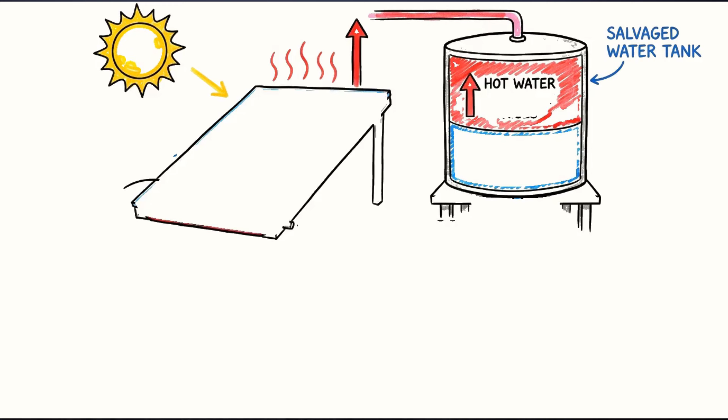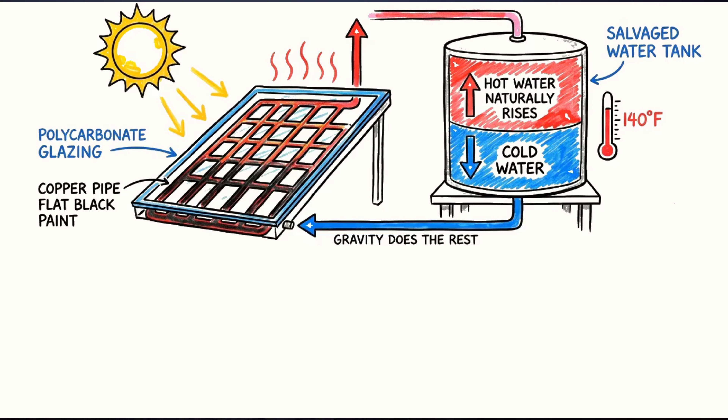This $75 system, built from copper pipe, flat black paint, a sheet of polycarbonate glazing, and a salvaged water tank, can heat 60 to 80 gallons of 140-degree water every day without a pump, a controller, or a single watt of electricity. It is called a thermosiphon solar water heater, and it runs on a principle of physics so simple

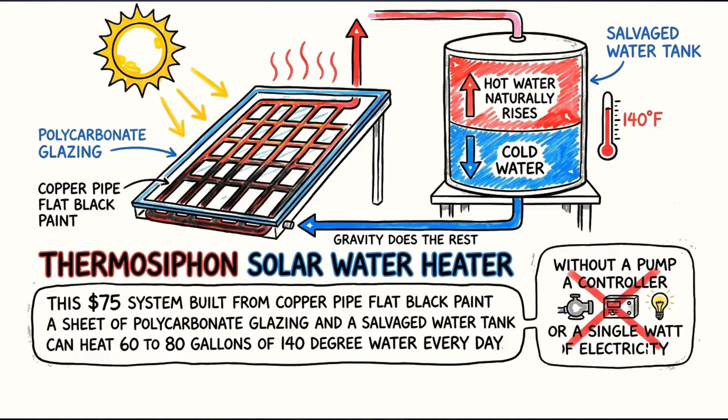that it was understood in the 1700s, where hot water naturally rises above cold water and gravity does the rest. In 1941, over 60,000 of these systems were installed across Florida, and more than half the homes in Miami heated their water with the sun.

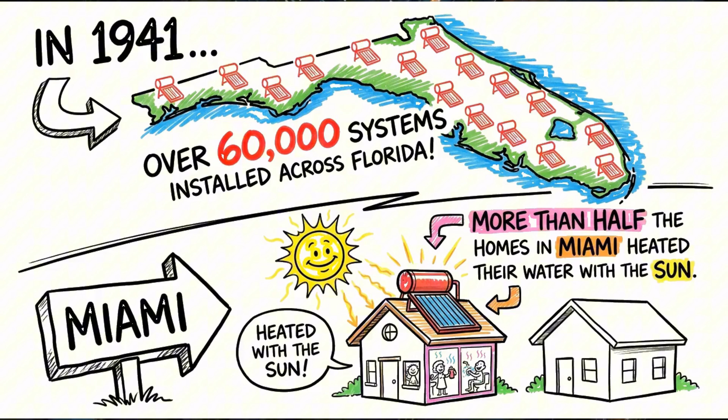But the technology was deliberately buried after World War II, and almost no American household uses one today.

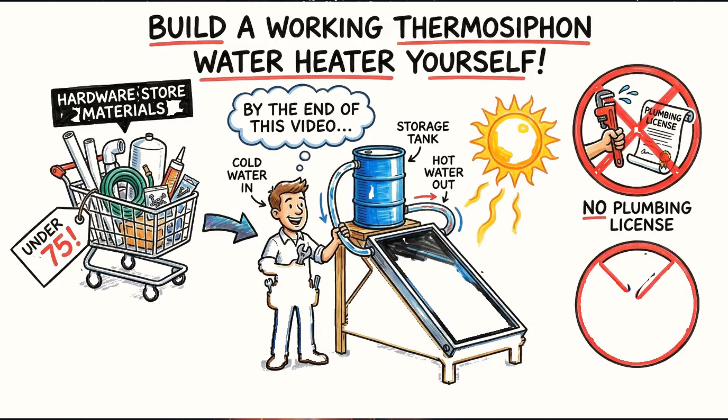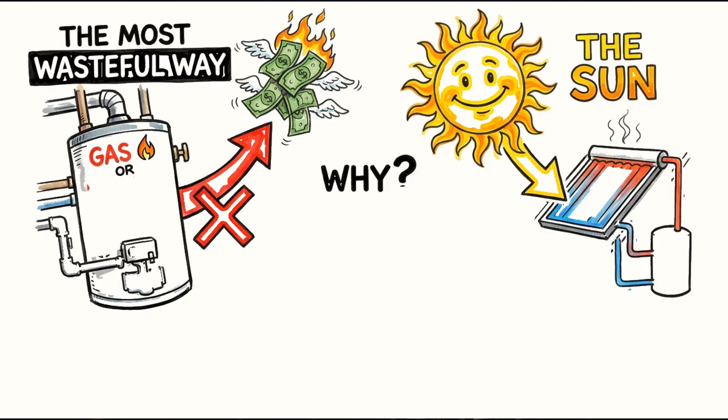By the end of this video, you can build a working thermosiphon water heater yourself from hardware store materials for under $75 in a single weekend, with no plumbing license and no electrical work. You'll know why a gas or electric water heater that costs you $400 to $600 a year to operate is

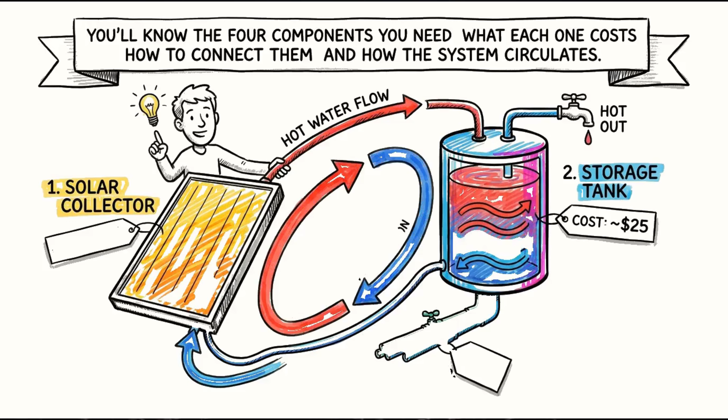the most wasteful way to make hot water when the sun does it for free. You'll know the 4 components you need, what each one costs, how to connect them, and how the system circulates water automatically using nothing but heat and gravity. And then, I'm going to show you why the $27 billion American water heating industry and the electric utilities that feed it made absolutely sure this technology disappeared from your hardware store, your building code, and your memory.

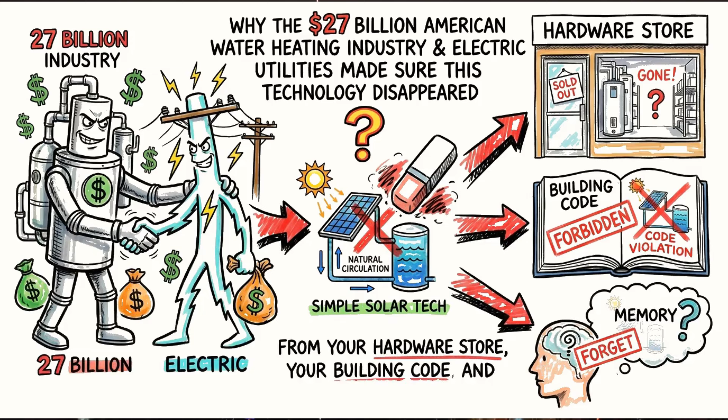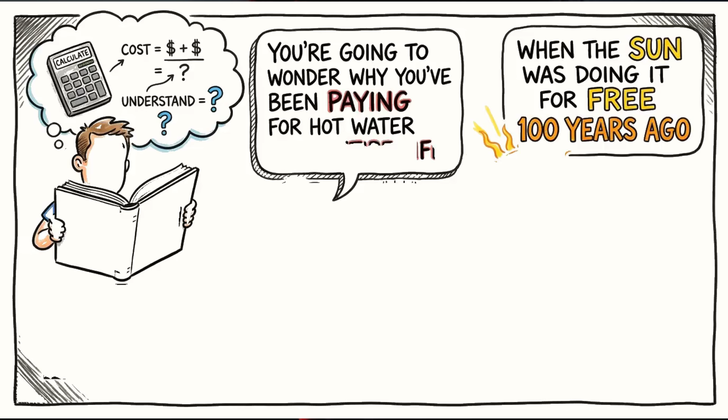But first, you need to see what your current water heater is actually costing you. Because once you understand the math, you're going to wonder why you've been paying for hot water your entire life, when the sun was doing it for free 100 years ago.

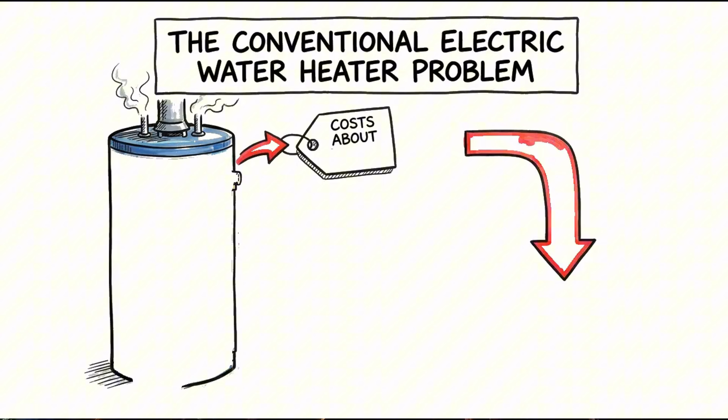Here is the problem with every conventional water heater in America today. A standard 50-gallon electric resistance water heater costs about $500, uses between 4,000 and 5,000 watts of electricity, and runs an average of 3 hours per day, which adds roughly $400 to $500 per year to your electric bill.

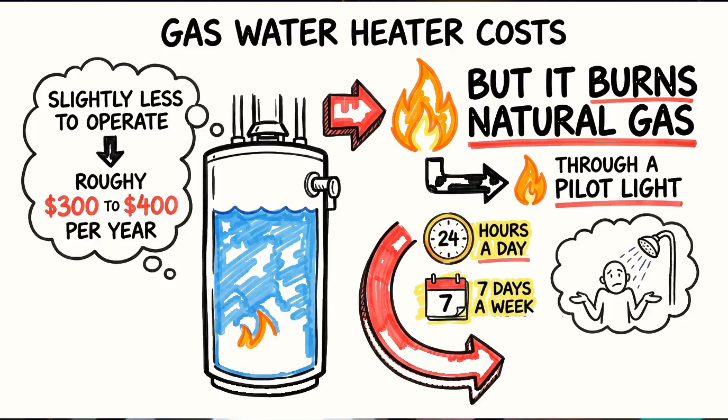A gas water heater costs slightly less to operate, at roughly $300 to $400 per year, but it burns natural gas through a pilot light that runs 24 hours a day, 7 days a week, whether you need hot water or not. Both types last 10 to 15 years before the tank corrodes and the heating element fails, and then you replace the entire unit and start the cycle again.

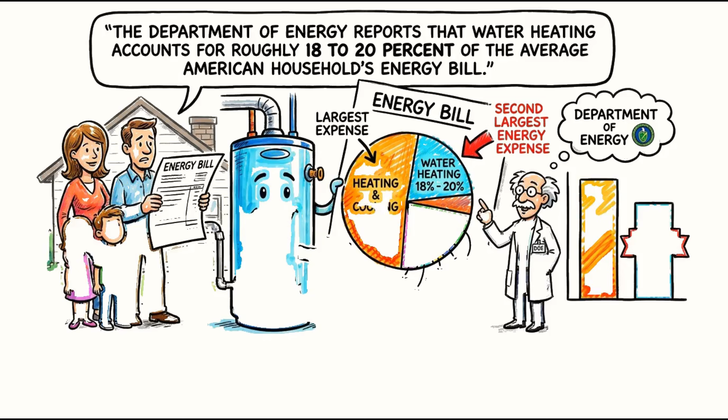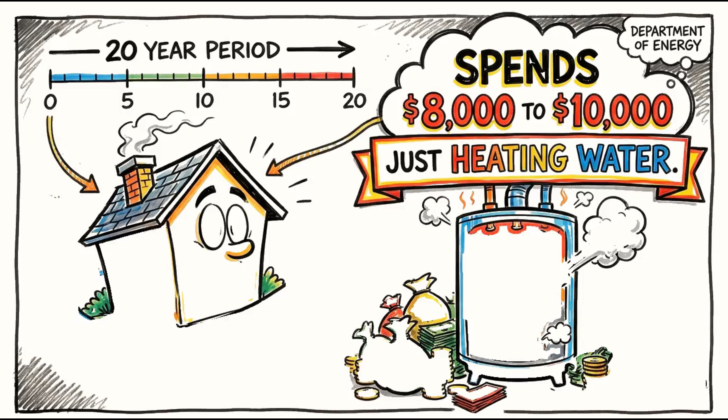The Department of Energy reports that water heating accounts for roughly 18 to 20% of the average American household's energy bill, which makes it the second largest energy expense after heating and cooling. Over a 20-year period, a typical household spends $8,000 to $10,000 just heating water, and that is not counting the cost of replacing the heater itself every decade.

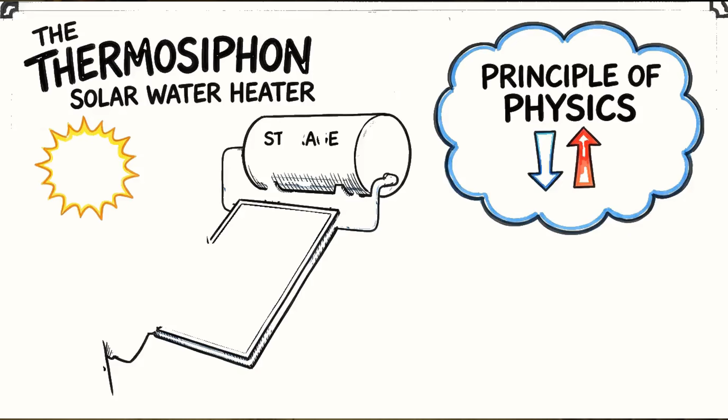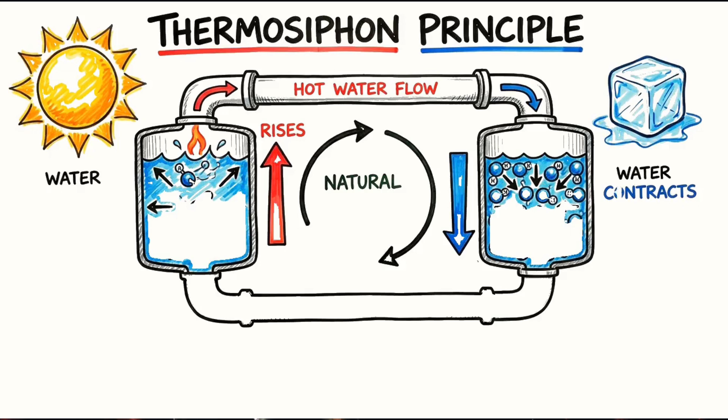The thermosiphon solar water heater eliminates that entire cost by using a principle of physics that requires zero energy input. A thermosiphon works because water expands and becomes lighter as it heats up, and contracts and becomes heavier as it cools down.

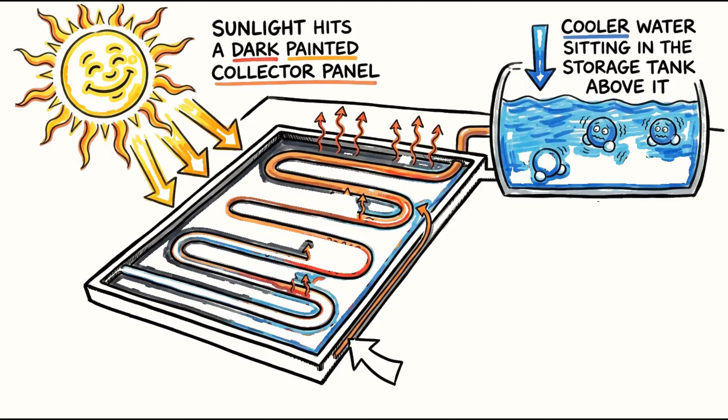When sunlight hits a dark painted collector panel, the water inside the panel's copper or CPVC tubes absorbs that heat and becomes less dense than the cooler water sitting in the storage tank above it. The lighter hot water naturally rises through the outlet pipe at the top of the collector into the storage tank,

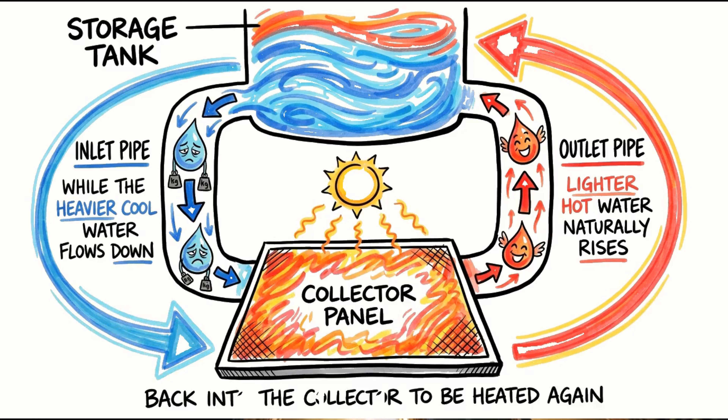while the heavier cool water at the bottom of the tank flows down through the inlet pipe back into the collector to be heated again. This creates a continuous, gravity-driven loop where water circulates automatically between the collector and the tank as long as the sun is shining,

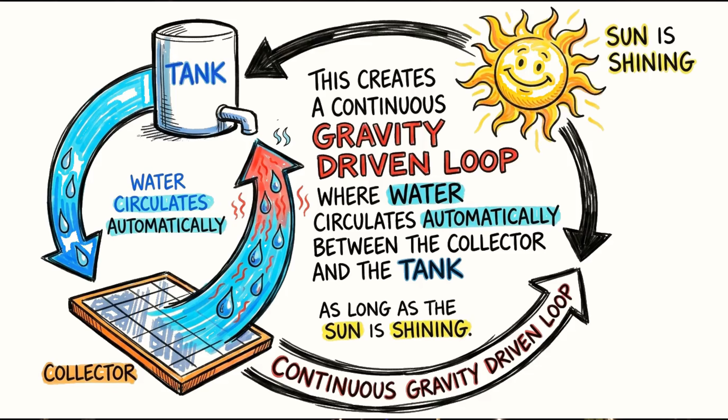with no pump, no thermostat, no controller, and no electricity. The principle is called natural convection, and it was first described by scientists in the 1700s, studying how heated fluids

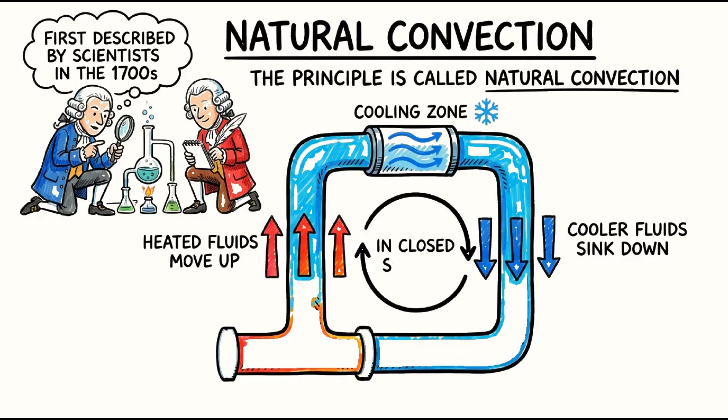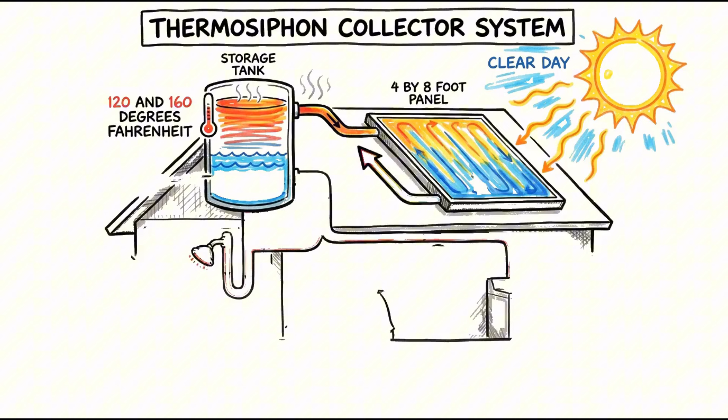move in closed systems. A well-built thermosiphon collector with a 4x8-foot panel can heat 60 to 80 gallons of water to between 120 and 160 degrees Fahrenheit on a clear day in moderate climates, which is more than enough for a typical household's daily hot water needs.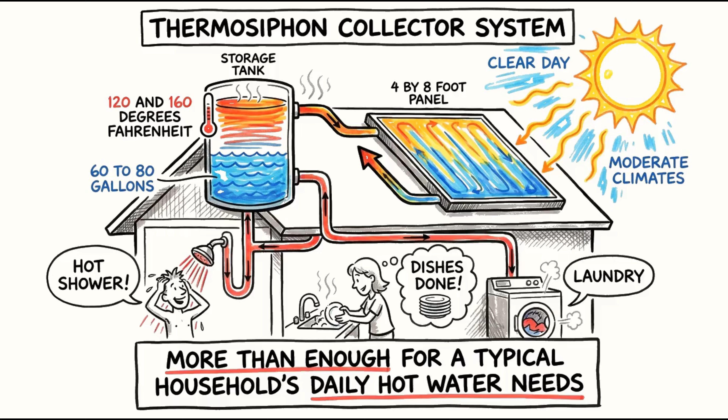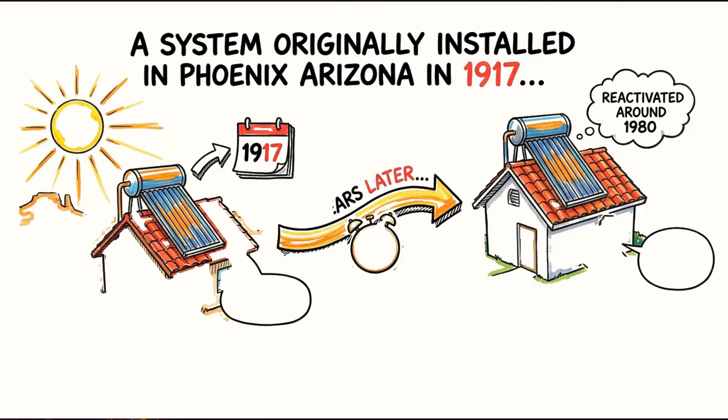The system has 0 moving parts, which means there is nothing to break, nothing to replace, and nothing to maintain beyond occasionally checking the collector glazing for damage. A system originally installed in Phoenix, Arizona in 1917 was reactivated around 1980 and returned to full service after 63 years of sitting on a roof.

If you're thinking this sounds too good to be true, the proof is sitting on rooftops across 3 continents right now, starting in the country that made it law.

In 1953, an Israeli engineer named Levi Yissar built the first prototype Israeli solar water heater and founded Neriah Company to manufacture them commercially in response to a national fuel shortage that had forced the government to restrict when citizens could heat water. By 1967, about 5% of Israeli households were using solar water heaters, but cheap oil from Iran made electricity affordable again, and demand dropped.

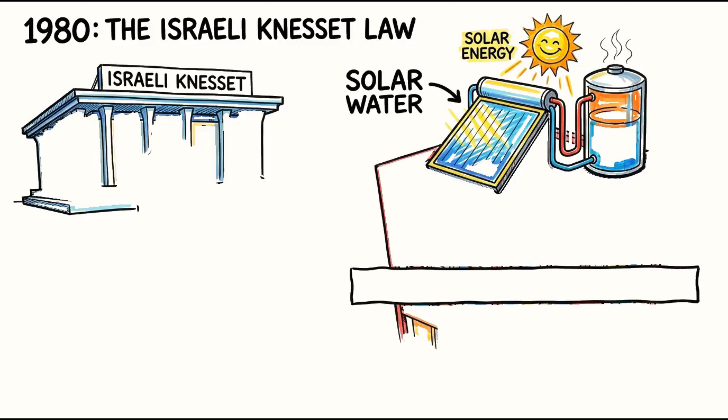Then, the 1973 oil crisis hit, and an Israeli physicist named Harry Zvi Tabor developed the modern thermosiphon solar water heater prototype that became the standard for the entire country. In 1980, the Israeli Knesset passed a law requiring the installation of solar water heaters in all new residential buildings up to 9 stories tall.

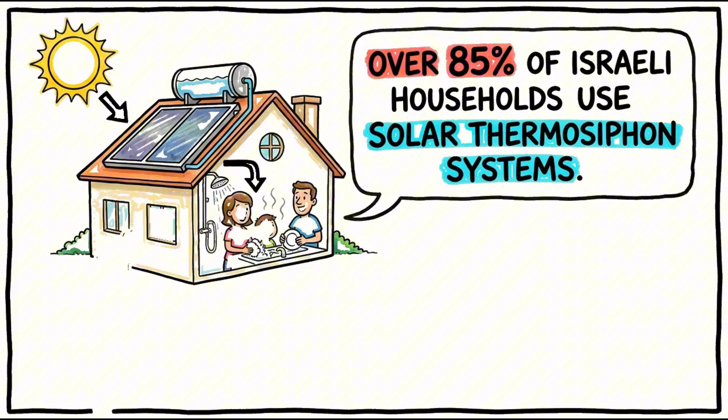Today, over 85% of Israeli households use solar thermosiphon systems, and there are over 1.3 million units installed across the country, saving an estimated 2 million barrels of oil per year.

Australia has deployed over 1 million thermosiphon solar water heaters, and Spain became the second country after Israel to mandate solar water heating in new construction in 2005. Meanwhile, in the United States, where the technology was invented, the residential solar water heater has almost completely vanished.

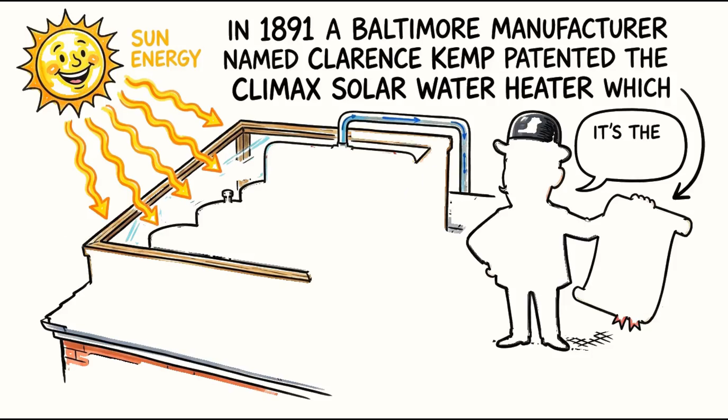In 1891, a Baltimore manufacturer named Clarence Kemp patented the Climax solar water heater, which was the first commercial solar water heating system ever sold. By 1897, a third of all homes in Pasadena, California, were heating their water with the sun using Kemp's design.

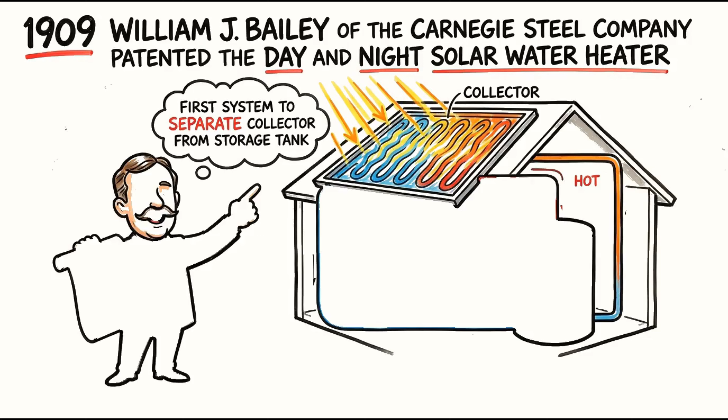In 1909, William J. Bailey of the Carnegie Steel Company patented the day and night solar water heater, which was the first system to separate the collector from the storage tank, using the thermosiphon principle to circulate water automatically between the two. Bailey sold over 4,000 units between 1909 and 1918, and the technology spread rapidly through California, Arizona, Hawaii, and Florida.

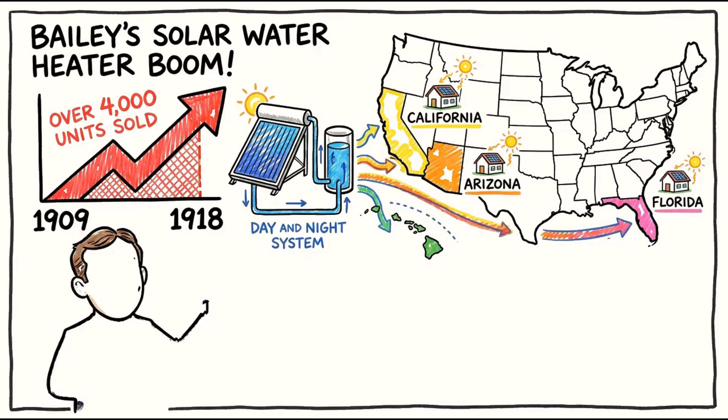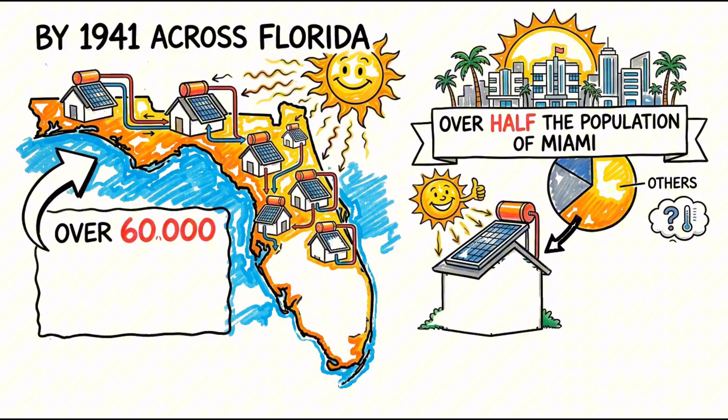By 1941, over 60,000 solar water heaters were installed across Florida, and over half the population of Miami heated their water with the sun.

Then, World War II froze the use of copper, killing new production. And after the war, Florida Power and Light launched an aggressive campaign selling electric water heaters at a discount to increase electricity demand. Discoveries of cheap natural gas in California had already killed the solar water heater industry there in the 1920s, and the combination of utility lobbying, falling electricity prices, and copper restrictions finished the job nationwide by the 1950s.

A technology that had been heating American homes for 50 years vanished in a single decade. Not because it stopped working, but because the utilities made the alternative artificially cheap. So why isn't it on your roof today?

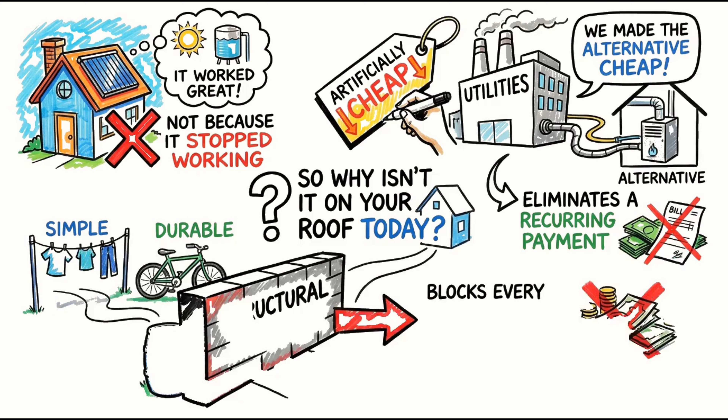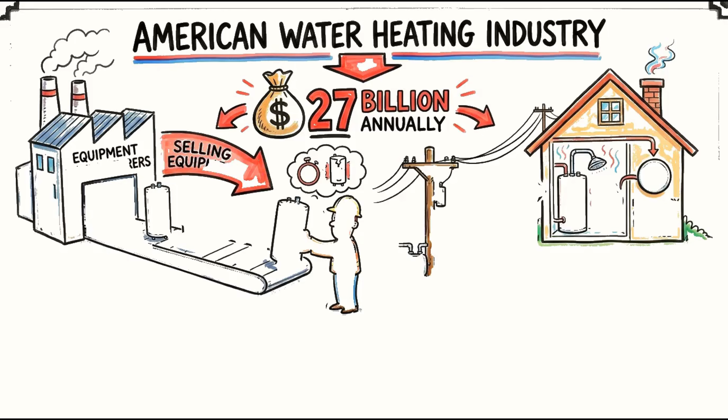The answer is the same structural barrier that blocks every simple, durable technology that eliminates a recurring payment. The American water heating industry generates $27 billion annually, selling equipment with 10 to 15-year lifespans, and the gas and electric utilities that power those heaters collect revenue from every gallon of hot water you use.

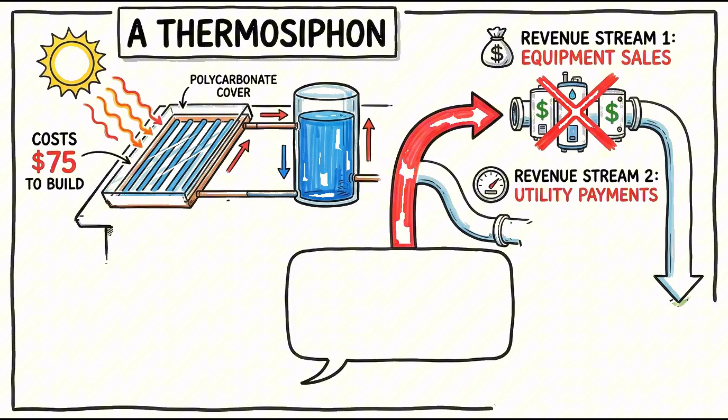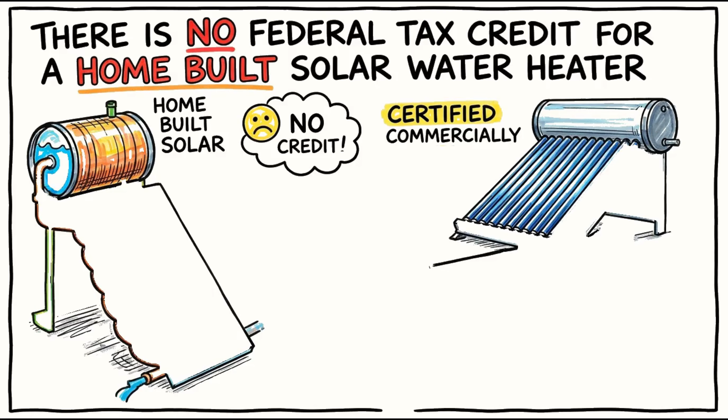A thermosiphon that costs $75 to build and lasts longer than the house it sits on eliminates both revenue streams simultaneously. There is no federal tax credit for a home-built solar water heater, and the residential clean energy credit that expired at the end of 2025 applied only to certified commercially installed systems, not to a $75 assembly of copper pipe and polycarbonate.

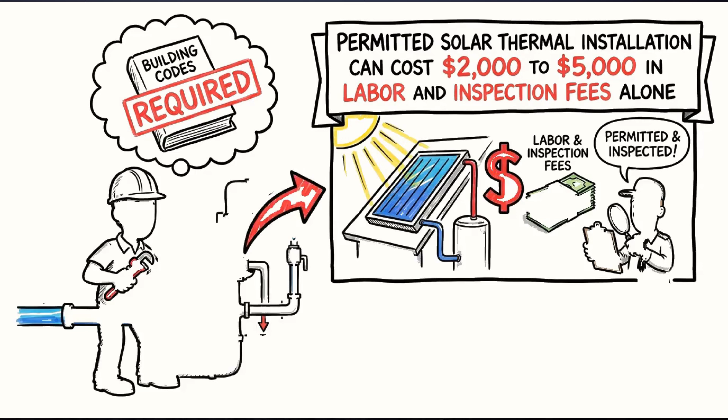Most building codes require a licensed plumber to connect any system to the domestic water supply, and a permitted solar thermal installation can cost $2,000 to $5,000 in labor and inspection fees alone, even though the materials cost under $100.

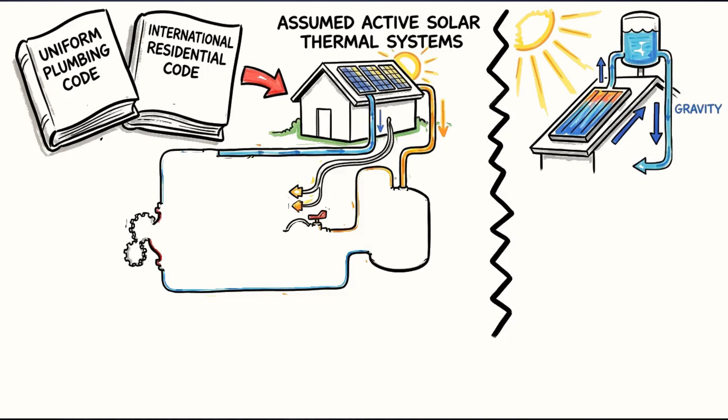The Uniform Plumbing Code and the International Residential Code both assume active solar thermal systems with pumps, controllers, pressure relief valves, and expansion tanks, and a passive thermosiphon that runs on gravity alone does not fit the compliance framework.

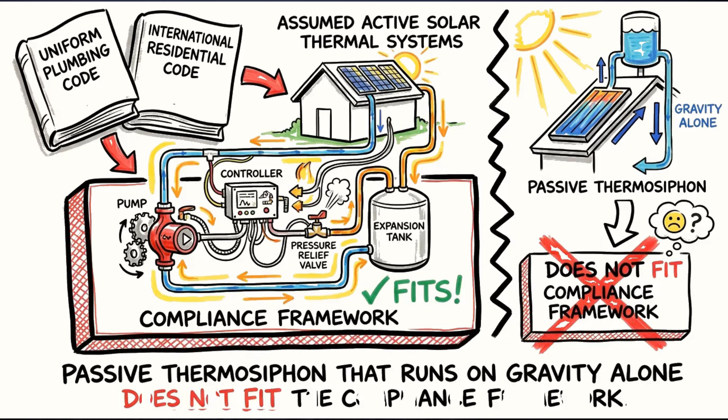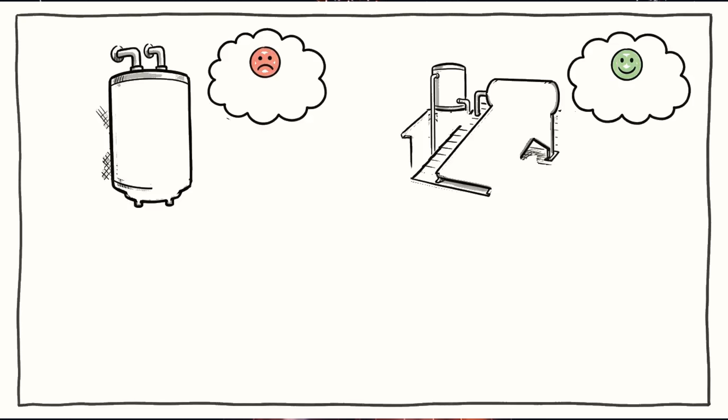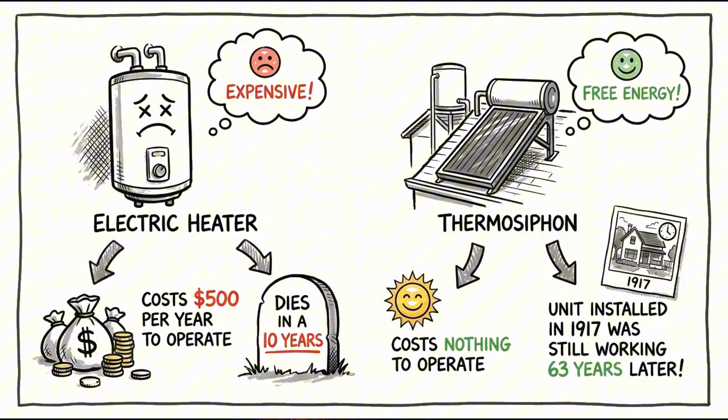We are told that a $500 electric water heater with a 10-year warranty is the standard, and that a passive gravity-fed collector is outdated. But the electric heater costs $500 per year to operate and dies in a decade, while the thermosiphon costs nothing to operate, and a unit installed in 1917 was still working 63 years later. The outdated solution is the one you have to keep paying for.

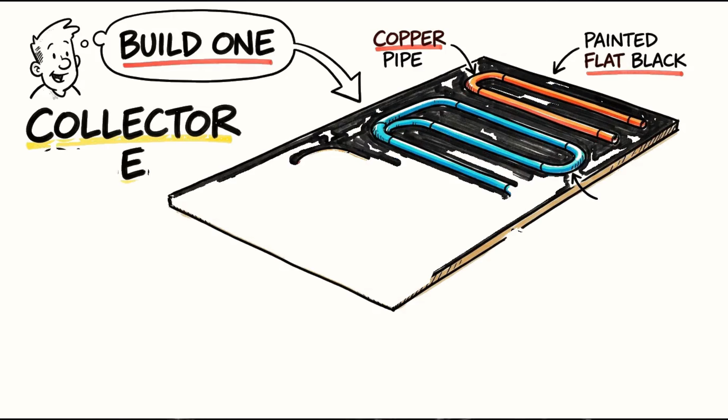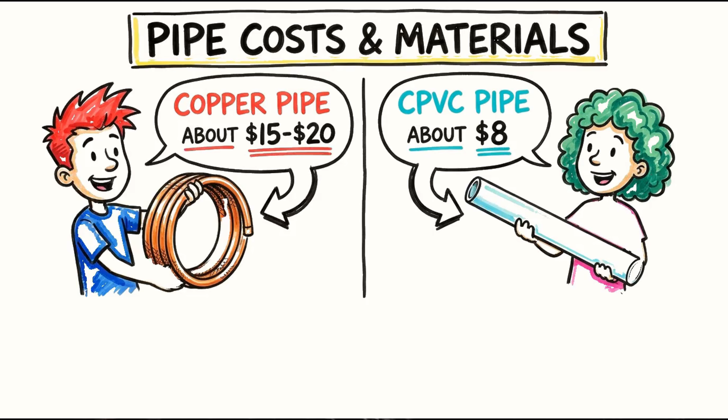Here is what you need to build one. Starting with a collector panel made from copper pipe or CPVC pipe, laid in a serpentine pattern across a 4 by 8 foot sheet of plywood, painted flat black. The pipe costs about $15 to $20 for a 20-foot length of half-inch copper, or about $8 for CPVC, which is rated for hot water and resists UV degradation.

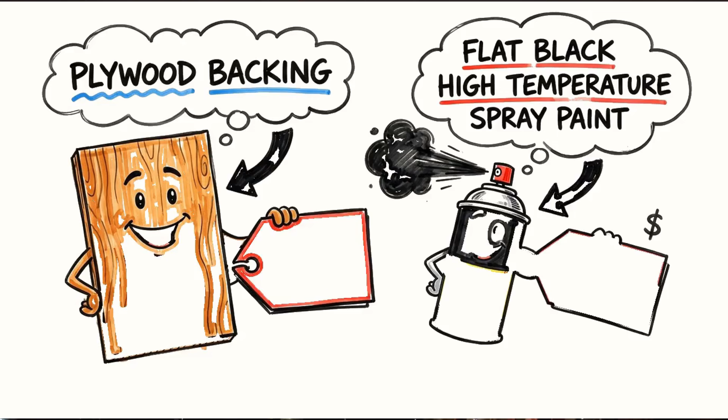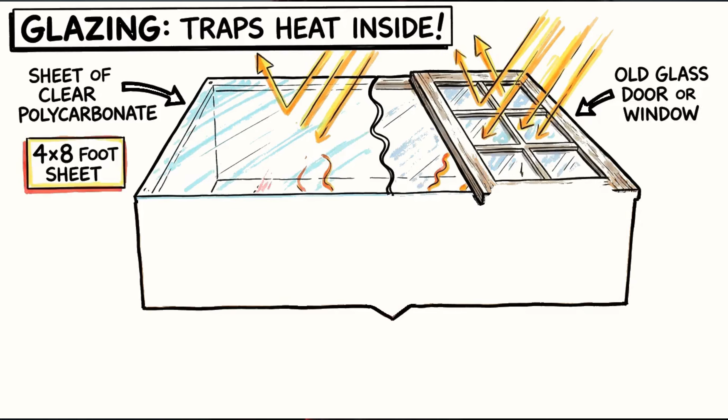The plywood backing costs about $20, and the flat black high-temperature spray paint costs about $8. A sheet of clear polycarbonate, or an old glass door or window, serves as the glazing that traps heat inside the collector, and polycarbonate runs about $15 to $20 for a 4 by 8 foot sheet at a home improvement store.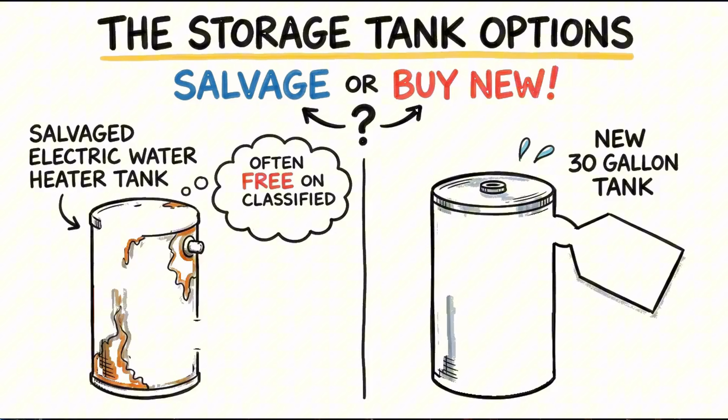The storage tank can be a salvaged electric water heater tank with the heating elements removed, which you can often find for free on classified sites, or you can use a new 30-gallon tank for about $40. Closed-cell foam insulation for the tank and pipes costs about $10, and basic plumbing fittings, including hose clamps, unions, and Teflon tape, cost about $5 to $10.

Total bill of materials sits between $60 and $90, depending on whether you salvage the tank or buy new, with the average build coming in under $75.

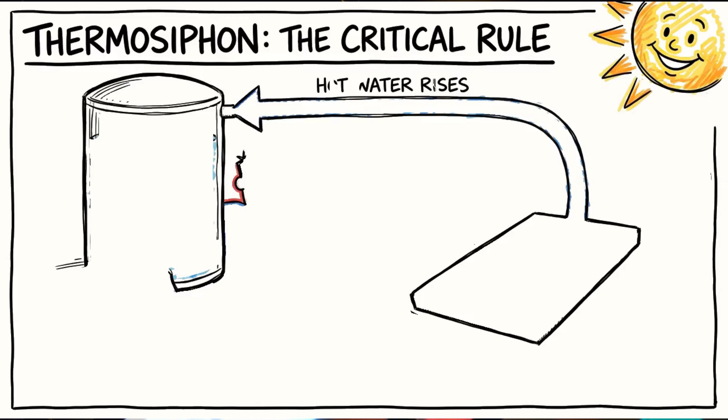The critical rule for a thermosiphon is that the bottom of the storage tank must be at least 12 inches above the top of the collector panel so that gravity can drive the circulation loop. The Build It Solar website, maintained by Gary Reysa, publishes over 100 detailed build guides for thermosiphon solar water heaters, with full materials lists, dimensions, and performance data from real installations.

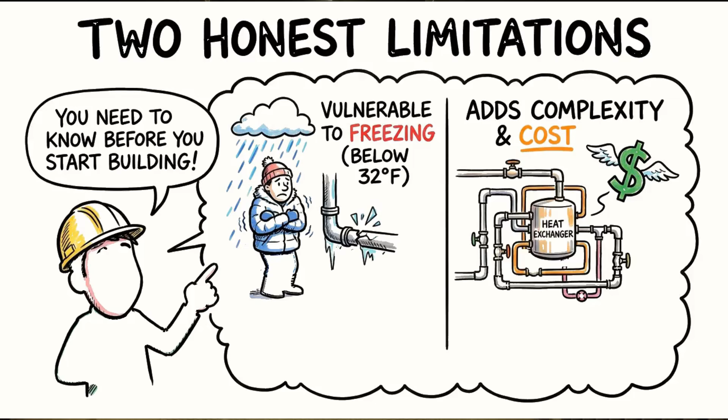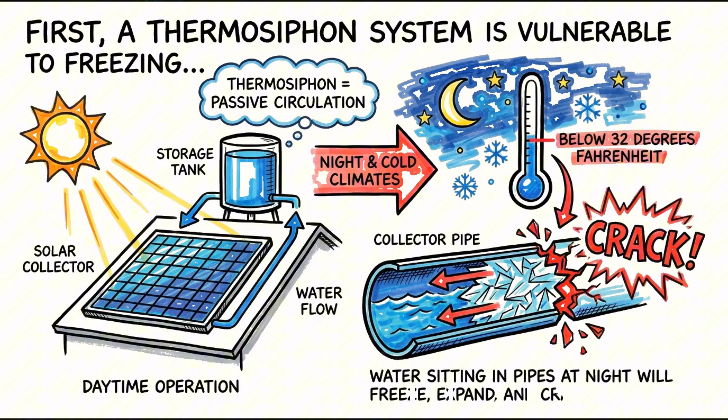Two honest limitations you need to know before you start building. First, a thermosiphon system is vulnerable to freezing in climates where temperatures drop below 32 degrees Fahrenheit, because water sitting in the collector pipes at night will freeze, expand, and crack the pipes. So in cold climates, you either need to drain the system seasonally or use a closed loop with antifreeze and a heat exchanger, which adds complexity and cost.

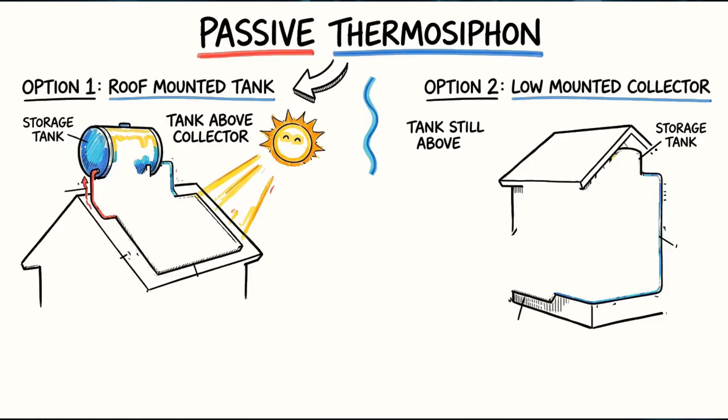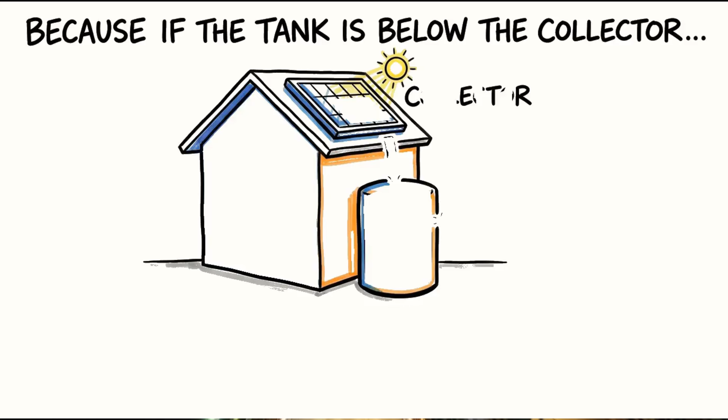Second, a passive thermosiphon requires the storage tank to be mounted above the collector, which means either a roof-mounted tank or a collector mounted low on a south-facing wall. Because if the tank is below the collector, the hot water cannot rise and the system will not circulate.

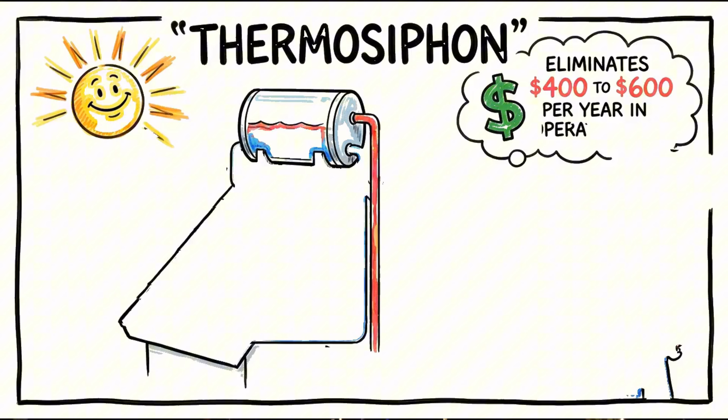But the Department of Energy says water heating is 18 to 20% of the average American household's energy bill, and a thermosiphon that produces 60 to 80 gallons of free hot water per day in moderate climates eliminates $400 to $600 per year in operating costs, starting from the first week it is installed.

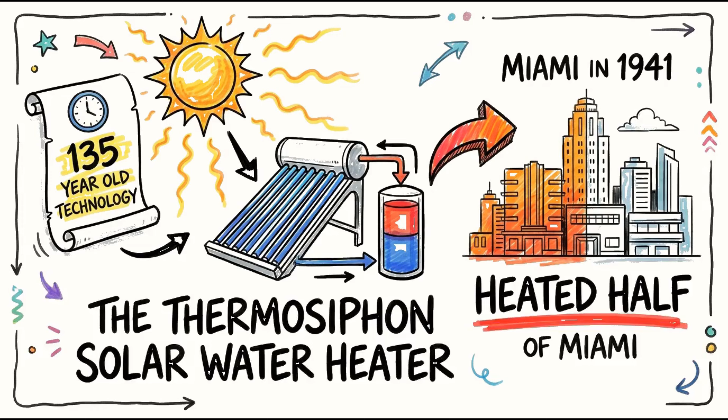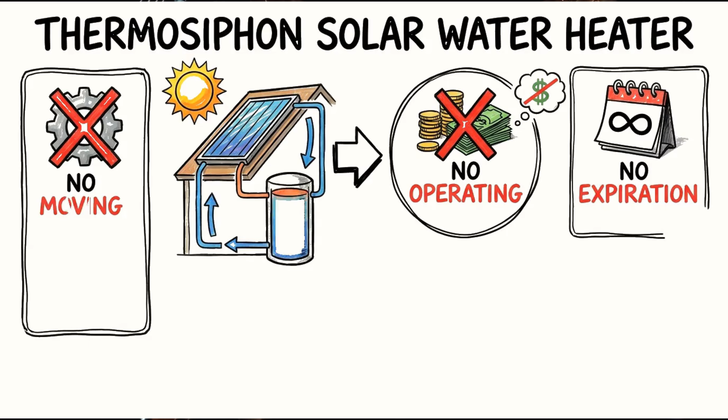The thermosiphon solar water heater is a 135-year-old technology that heated half of Miami in 1941 and heats 85% of Israel today. It has no moving parts, no operating cost, and no expiration date. And the utility industry made sure you never found out about it.

A lot of what this channel covers sits outside the mainstream, not because it stopped working, but because the system was built to sell you the version that keeps the meter running.

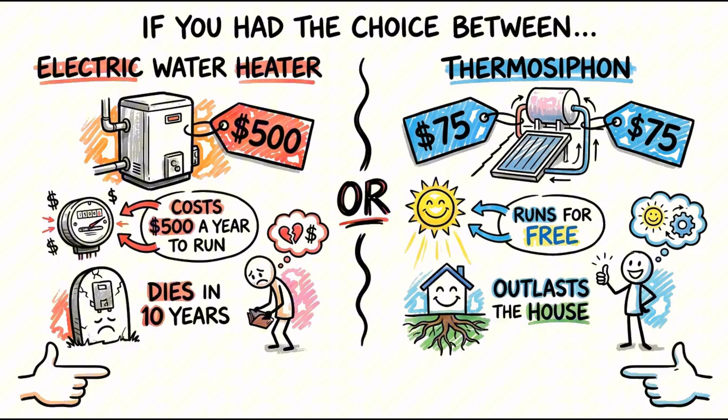If you had the choice between a $500 electric water heater that costs $500 a year to run and dies in 10 years, or a $75 thermosiphon that runs for free and outlasts the house, which one would you build? Drop your answer in the comments because I genuinely want to know.